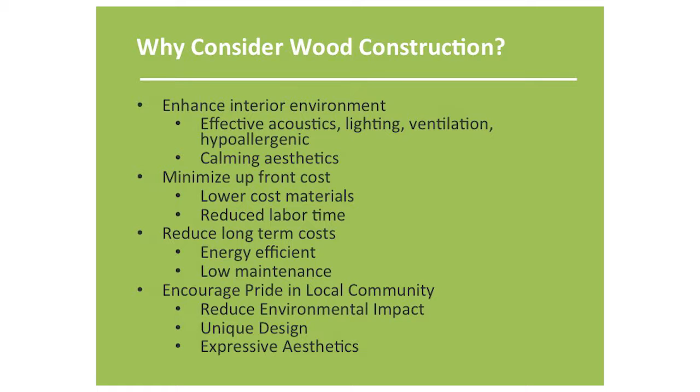Now, we've got all the population coming in. The challenge with that is the tax base doesn't instantly catch up. It takes a little bit. So we've got to minimize those upfront costs. We also have to reduce the long-term costs. We'll look at how wood construction can help do that. We've got to encourage pride in the local community.

Now, I mentioned enhancing the interior environment. This has long been done. Now, you're going to see a lot of illustrations today from British Columbia and Canada because they have long embraced this concept where they're using wood for the interior environment. It gives a calming and soothing effect. They do it within their healthcare facilities up there, in their schools. The Japanese have done it in their school systems for a long time.

And there's a great study that was done recently. The University of British Columbia and FPInnovations did this study. They created 4 environments, exactly alike, with and without wood, with and without plants. They took 119 students, and they were looking at the effects of wood finishes in plant study. Now, the way they did this is they monitored the sympathetic nervous system. So looking at heart rate, skin conductivity, measuring this basically in real time as these stresses are applied to the students. So they had 3 periods: waiting in the room, taking an audio math test, and then the recovery alone after the test.

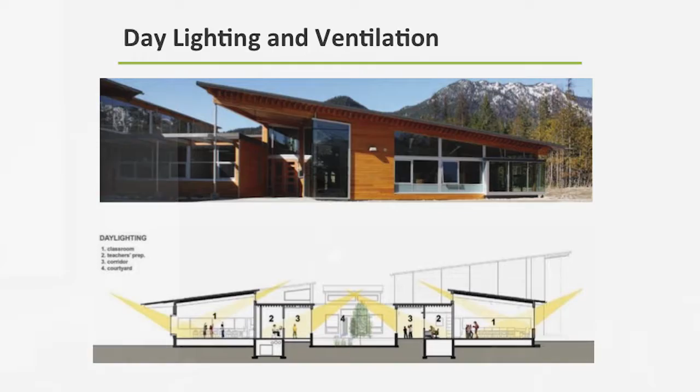I remember dark, horribly, this is the worst color blue I've ever seen in my life. It's etched into my brain. If I have a nightmare, it's that color of blue somewhere. And it was dark. It wasn't this appealing construction.

Type 2 typically is light gauge steel, concrete, even heavy steel, but that's not what we, with our industry, are really hoping for here. This is the areas we're aiming at. But you'll notice the square footage and the heights can drop. Now, this is a tabular value. When you add sprinklers, when you have what we call open frontage where the fire equipment can get in, these can grow a great deal, and I'm not going to dig into that today.

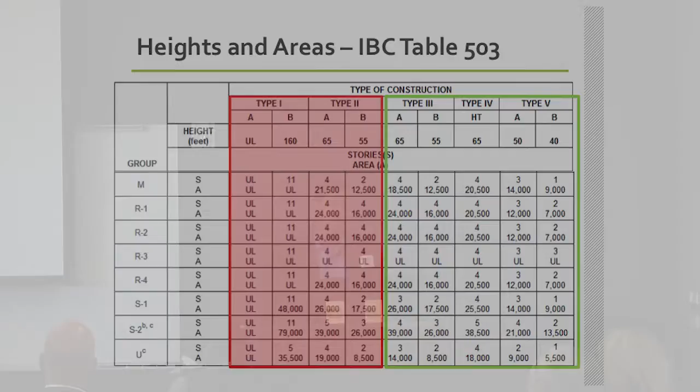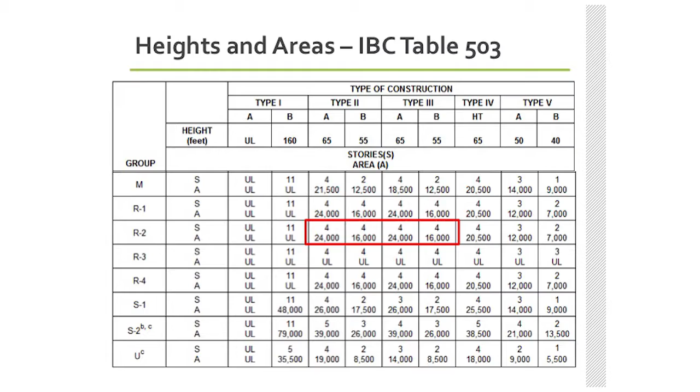Type 3A, I can do the exact same thing, and you'll notice 2B and 3B are exactly the same as well. So you can see that there's a lot of similarities between these two different building types with the advantage of using either one. And you'll notice that a lot of these are the same. It doesn't matter what the occupancy is. They're very close. They're not always exact, but they're pretty darn close between type 2 and type 3 construction. So why does that matter? Well, the cost.

This is an average. Now this comes from the ICC. I know a lot of you are painfully aware of the ICC. That's part of what you do every day. ICC publishes some great data every 6 months. It comes out in February and it comes out in August. And it's the ICC valuation data. And what they do is they take every occupancy, and I'm just listing 3 of them here, and they go through every building type or every type of construction, and they have an average cost per square foot.

Now this is a national average. Now any 2 buildings, they could be the same side by side depending on detailing, layout, structural design. There's a variety of things that come into play, but this is a national average. So if we look, I've got 3 occupancies that we would tend to deal with in the projects we're talking about today. So you've got A3, which would be assembly, such as libraries. And you can see the cost per square foot average. Now this doesn't include the civil or the land here. This is just the structure itself. R2, which would be student housing, and then E, occupancy for education.

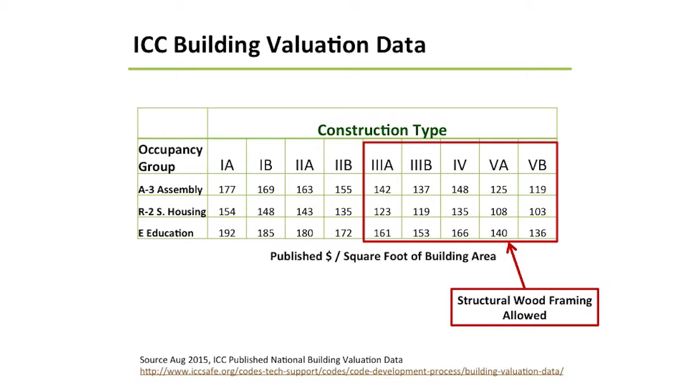And you can see if we defaulted to type 2 every time, there's a far greater cost per square foot. And if we break that down a little bit and try to keep it to the right where that structural wood is allowed within the design, here's some example savings of that. So A3 assembly, we're saving 21 bucks a square foot. R2, we're saving $20 a square foot. Now again, this is a national average. It's not exact. This is just a thumbnail look at the different construction types. And education, almost $20 a foot as well.

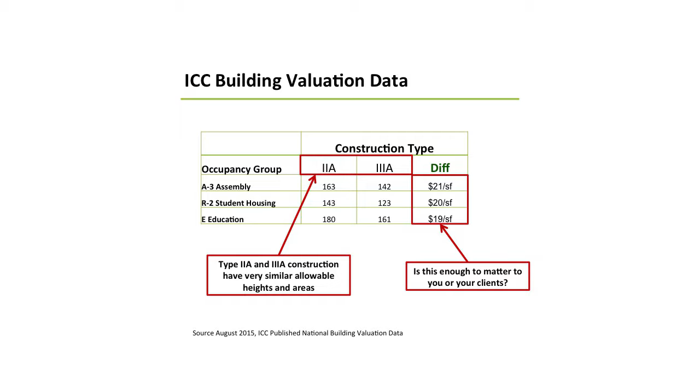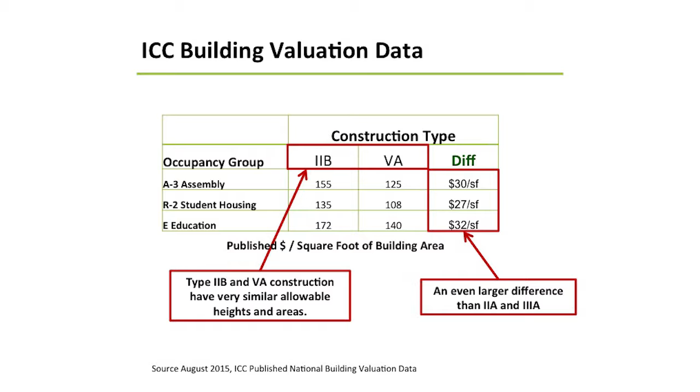Now student housing could be 200,000 square feet, easily. Let's just say it's 100,000 square feet. Right there, you can see, you multiply that by 20, that's a huge savings. Huge savings. Education, again, if you've got 1,000 square feet plus 10,000 square feet, you're going to see a substantial savings. And then look at 2B and 5A, which often are pretty close in capacities as well, and the savings are even greater. So that's the goal, is to try to get it to the right of that. And that can be challenging for architects and engineers to make all that work.

I'm going to put up a lot of public school projects up here so you can see that. Now this is an example. This is in Hot Springs, Arkansas. This is the Fountain Lake Middle School. They save $40 a square foot. And a lot of times when you say a wood school, the general public conceives the old wooden schoolhouse. And you'll see that a lot of these are not the wooden schoolhouses that come to mind. These are grand, beautiful projects that really embrace the design. The construction here is pretty common to what we see in the area. Wood studs, plated trusses.

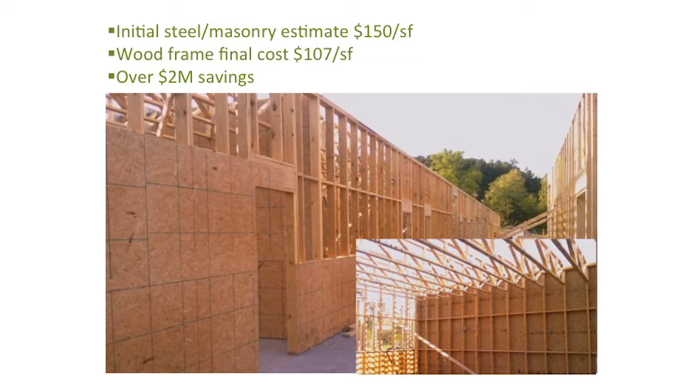The initial steel and masonry estimate for this project was 150 bucks a square foot. The wood framing cost 107. They saved $2 million on this project. That is substantial for any school district, regardless of scale.

This is another one. I believe this is near Memphis. Now, this particular architect attended one of our events, looked at how we showed some schools around the nation. This is a pretty sizable school, 71,000 square feet. They knocked out some costs, $10 a square foot. You can see it under construction.

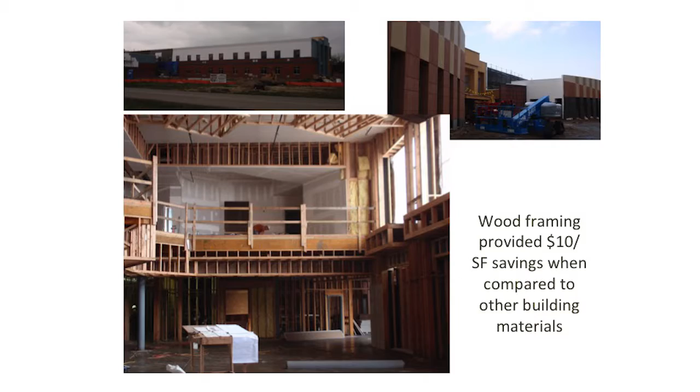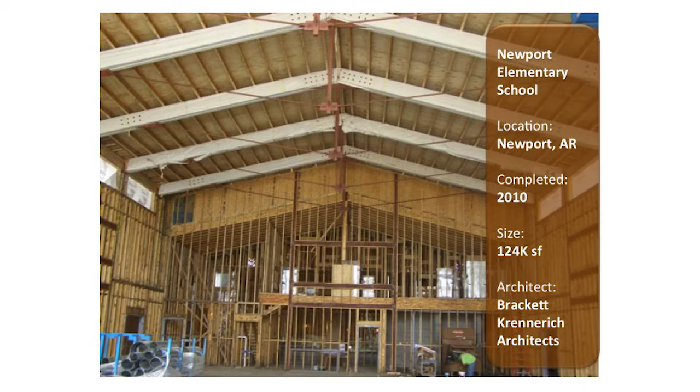This is the Newport Elementary School. 124,000 square feet, which would be a more reasonable size for a school here in South Carolina, particularly in this area. $30 a square foot saving there, according to the architect. $20 a square foot were attributed to the wood construction itself. This is type 5B, so it was to the far right of that table 503 we looked at.

Now I'm going to jump. We're going to go all the way to the other side of the country, as far as you could literally go just about, to the Bethel School District, which is in Pierce County. Now it's just right outside of Tacoma, if that gives you a good example. The Bethel School District has 23 facilities within their district. All of them use wood construction.

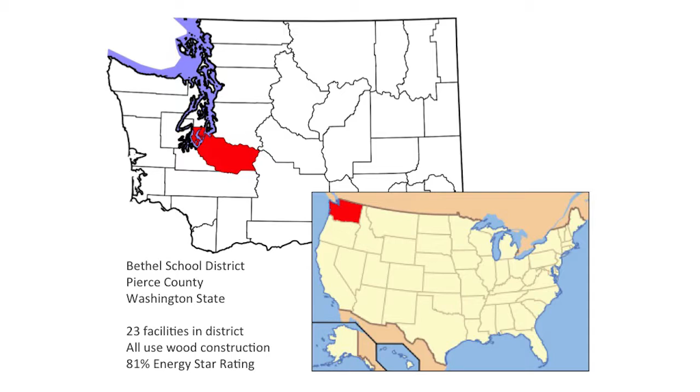And what I want to talk about is we looked at the upfront costs, but I want to look at those long-term costs and the savings that go with wood construction. And schools, public schools in general, are a great example of this. 81% of their schools meet the ENERGY STAR rating. Now that, for those of you within the school system, or if you're familiar with the ENERGY STAR rating system, that's hard to hit. And that is phenomenal that they can get 81% of their schools to do that.

Now, those particular schools in the Bethel School District knocked down their electricity consumption, and that's from 2004 to 2011. So it makes the number look a lot bigger, but it's still substantial. Saved $4.3 million in utility costs. $4.3 million, again, regardless of the size of the school district, is substantial savings. Well, how did they do this? Well, a lot of what they're doing is they're using wood to save money on the initial upfront cost, and it allows them to invest in better energy efficient designs, mechanical systems, insulation, and so on.

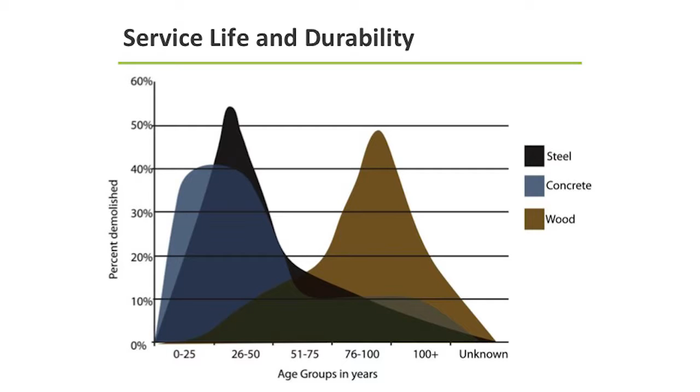And if you look at those buildings that they tore down, this is what they were composed of. Concrete in blue, steel in gray, and wood in brown. And you'll notice that until you get up to about 50 years, the majority of those structures were not wood. The durability is not the issue, it's the application of it and getting the public to embrace the concept.

Here's another great project. This is out in Arizona. Now this is a unique climate because it tends to be hot. Smaller school, it is a LEED school, 6,200 square feet. This actually has won numerous awards because of its efficiency. And the same thing, they're using wood construction, they're enhancing the insulation capacity of it, and using some of those cost savings to apply toward better energy reductions.

17.5% reduction in the first year, up to 35% now because they're honing in. A lot of these systems you have to hone in a little bit. They've got an overall Energy Star rating of 87 and recognized 2 consecutive years.

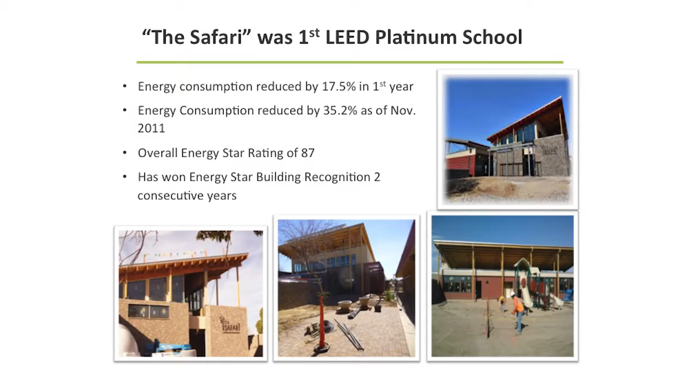Now we talked about new construction. Within this state particularly, if you get into a historic town, where Greenville is actually growing, it's new, it's vibrant, you go into Columbia or you go into Charleston particularly, there's a lot of old construction. And we don't need to get rid of that. Sometimes we just need to redevelop it.

Now this is a great project. This is up in Minneapolis, and every time I go up there I swear I'm going to go see this thing and I never get around to it. This is called the Butler Brothers building. Now, this is 9 stories tall, 500,000 square feet. This is all wood. Now it has a brick facade on it, but this is a wood constructed project.

How many of you remember the Benjamin Franklin stores? Anybody? A few of you? Long time ago, this was actually their vertical warehouse. Sears Roebuck had one down in Atlanta. It was the same concept, but it was concrete. This one's actually wood, built early 1900s.

There's another picture. They redeveloped this in the 70s. They took the center of it out. It was so big and so vast that if you got into the center of it, they said it was like a cave. It was too dark. Nobody wanted to be in it. So when they converted it to office space, they actually took the center out of it.

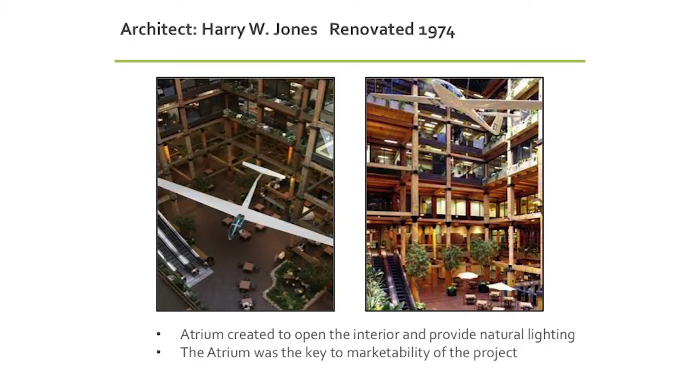And so it has this large multi-story atrium. Literally has a glider, a real life-size glider hanging in the middle of it, in the picture I have. Beautiful, beautiful project. And it's a great example of wood construction and how it holds up over time.

This is actually up in Pennsylvania. This was a hospital, and they repurposed it to utilize it for classrooms. So almost 200,000 square feet of renovation, and then they added onto it as well. And you can see this is the finished picture here. And you get a bit of the history just by looking at the picture of it. You can see on the back what they've added on. Built in 1872 originally.

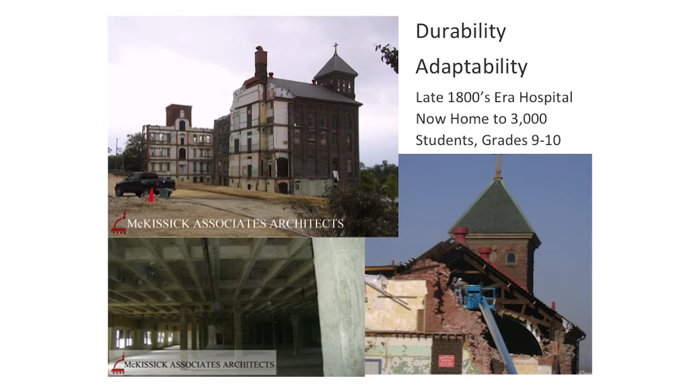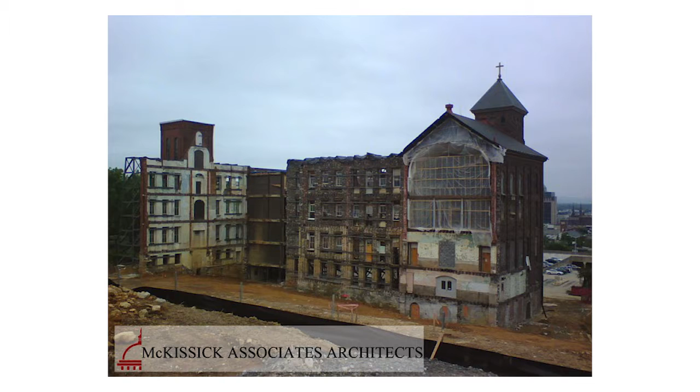Some of the pictures under construction. Now the lower level is concrete, but up above that you'll see wood construction. And you can see it if you look where they're tearing away some of the old, it's hard to see on this screen, but you can see heavy timber frames in there, gorgeous timber frames. Large trusses up in the roof. Now those are not 2x. This is all wood. It's still usable after over 100 years.

There's the finished product. So we have a lot of buildings within our state where we may not necessarily need to go in and tear them down, particularly if they're wood. Maybe they just need to be repurposed. There's a lot of good engineers in this state that can show you the ways to do that.

Now, I talked about the wow factor. So we've looked at long-term costs, and the last bullet I want to talk about is encouraging pride in our buildings. If it's a special building, it becomes special to people, and it tends to stay there for a long time. How many of you, your high school still exists? Few, some not, you may not know.

Mine barely exists. These things don't last forever, but if your high school was special, if it was uniquely built, if it has a good look to it, if it's historic in any aspect, they keep it, they maintain it. And this is something that they talk about a lot in these new projects.

Now, I'm going to show you kind of the upper echelon of wood construction. This is the El Dorado School, however you want to say it, in Arkansas. Dunn, I believe he is the school facility director there. And this is one of his points. They have a dropout issue. We all have a dropout issue within our schools. And part of it is nobody wants to go to school.

If you go to that horrible, ugly blue school I went to, that's not where I wanted to be. And I can remember, there was a lobby where it was all glass, and that's where we all went. You ran to your locker down that dark dungeon of a hallway, you grabbed your stuff, came out of the concrete blocks, and you came into the lobby where there was glass and there was wood seats.

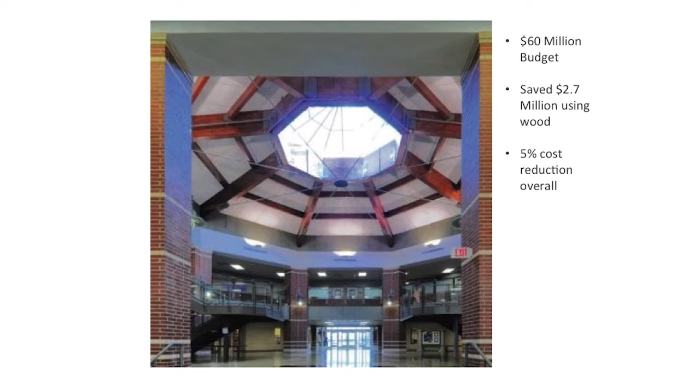This looks like any other school until you walk inside. $60 million budget. They saved $2.7 million changing over to wood construction. And you see they're using common sense. Now, this is a public school. They're not using wood down here. They're using brick where they can't carve their initials in it. There's common sense applications. And you'll notice the block on the first level.

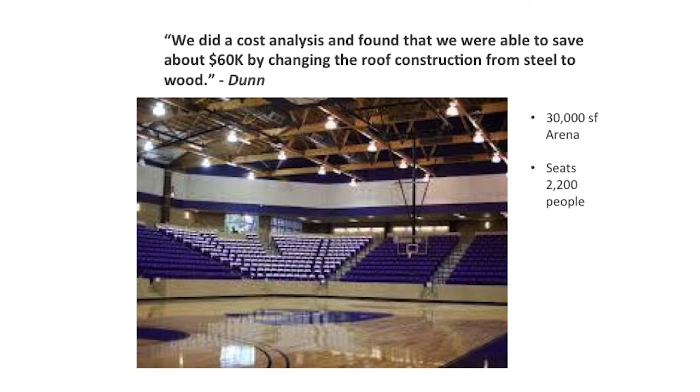This is pretty neat. This is actually their arena. Now, this is a sizable school. 30,000 square foot just for the arena, seats over 2,200 people. Now, look in the roof there. They changed those from steel to wood, and they saved $60,000. Those are 165-foot spans, 20 foot deep, and a much better looking gym than the one I grew up in, I can guarantee you that.

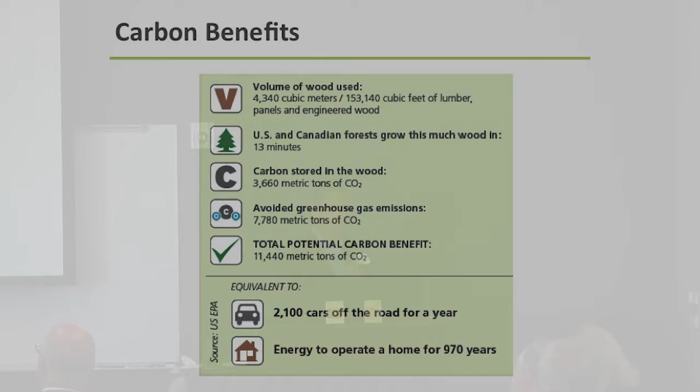There's also sustainable benefits when we talk about carbon sequestration. Now, having a lot of people here from the forest industry, you know already that half of the weight of wood is basically carbon, 49 to 50% depending on species. If we know the carbon, we know how much carbon dioxide has been brought in, sequestered in the form of carbon, and the rest is released as oxygen. If you look at this particular school, over 4,300 cubic meters of wood used in it. We grow that much wood in North America in 13 minutes.

Part of the perception or the misperceptions we fight within the public is that if you're using wood, you're ruining our forests. And we all know that's not the case. You show examples like this, we grow this much wood in 13 minutes. It's easily sustainable and very replenishable. The carbon stored here, you can see that in metric tons of CO2 equivalent. And then the greenhouse gases. So if you put this into what the public understands, in fossil fuel consumption and the carbon output, that's equivalent to 2,100 cars off the road for a year, or enough energy to operate a home for 970 years. That's what the public understands right there.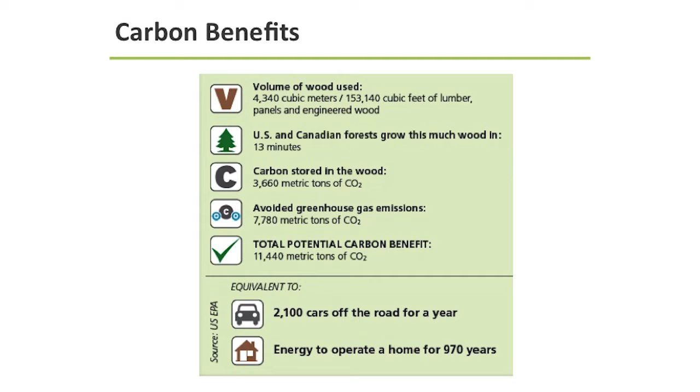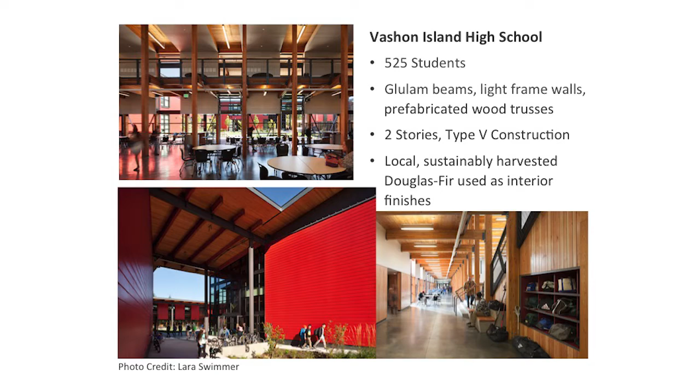This is an office project. This is actually down in Wilmington. Live Oak Bank headquarters. This is all wood design. Beautiful project. This is a ranger station in California. But it could be any general administrative government building. This is Stapleton Library up in New York. Notice the wood roof, the wood glulams in some of the wall.